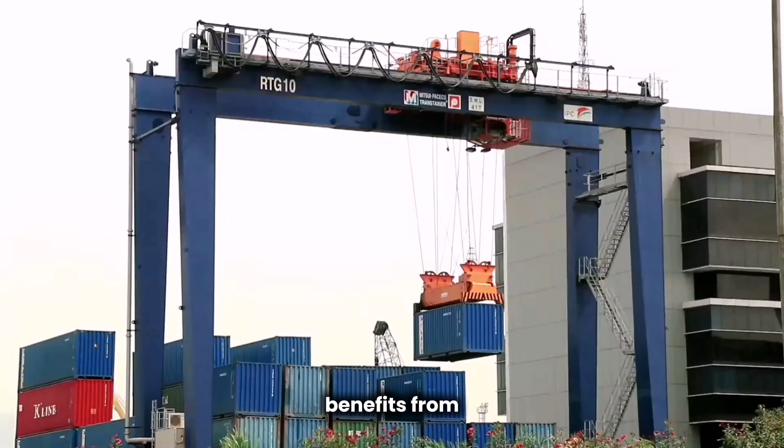Welcome to PT Fujita Indonesia, a leading forging company and automotive components manufacturing industry, strategically located in the Karawang International Industrial City. Located in an integrated industrial area and just a short distance from Jakarta, PT Fujita Indonesia benefits from excellent access to distribution channels. Founded in 2002, PT Fujita Indonesia began its journey of innovation and dedication to manufacturing components for the motorcycle and automotive industries.

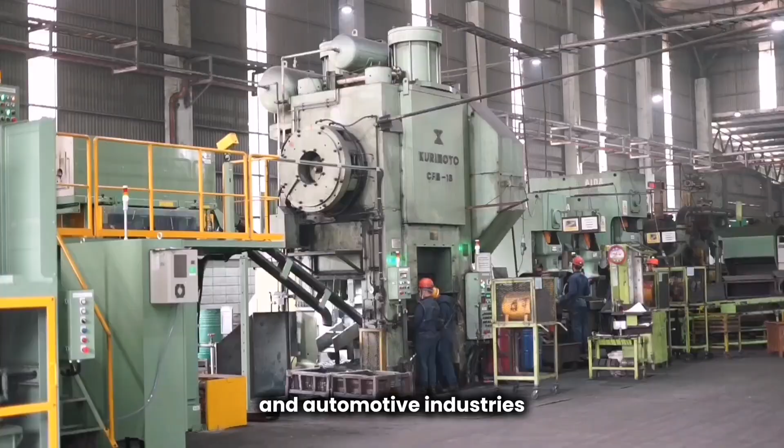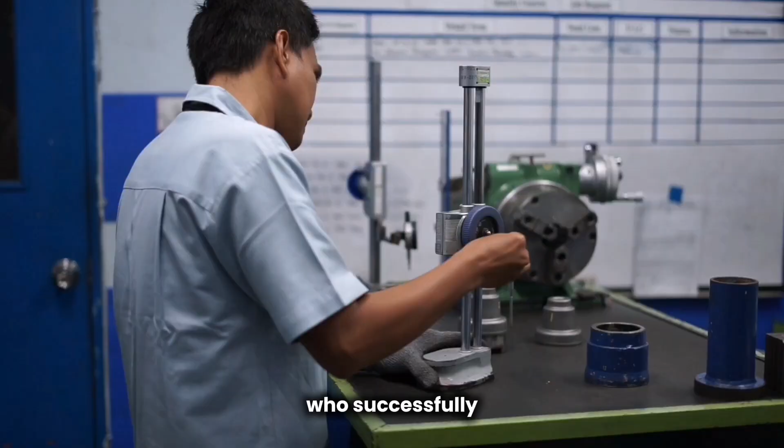Drawing inspiration from our founder, Mr. Tasaku Fujita, our company has consistently embraced the philosophy of Kaizen, or continuous improvement. Continued by the second-generation CEO, Mr. Seisaku Fujita, with a strong vision, he is the person who successfully created the foundational basis for all the companies within the Fujita Group.

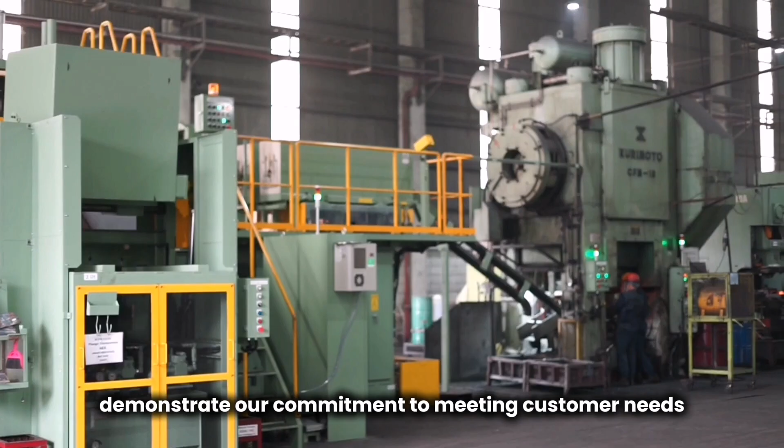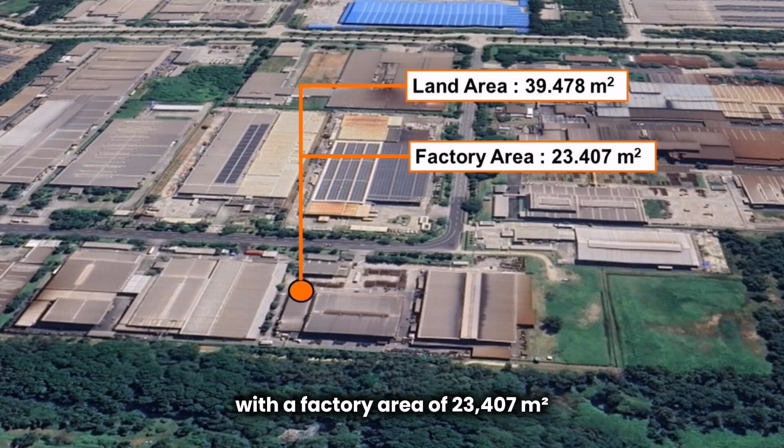In response to growing demand, we established Plant 2 in 2006 and Plant 3 in 2010. These expansions demonstrate our commitment to meeting customer needs with enhanced production capacity and stringent quality standards. Our facility spans 39,478 square meters of land, with a factory area of 23,407 square meters.

Currently, the commissioner of PT Fujita Indonesia is Mr. Tetsuo Fujita. He always brings a spirit of innovation and high dedication to advancing the company.

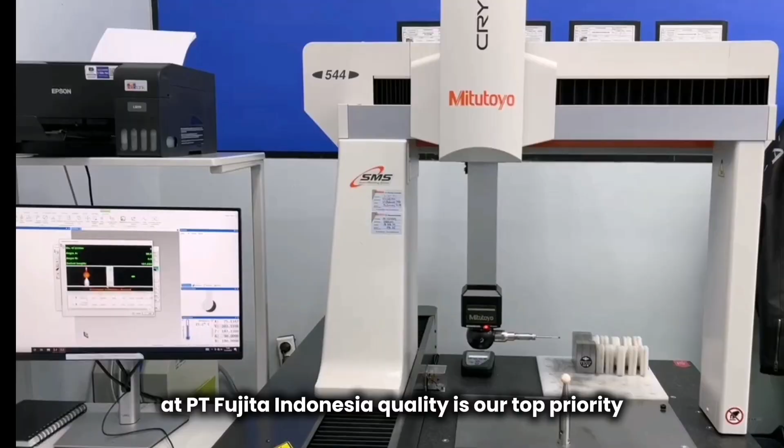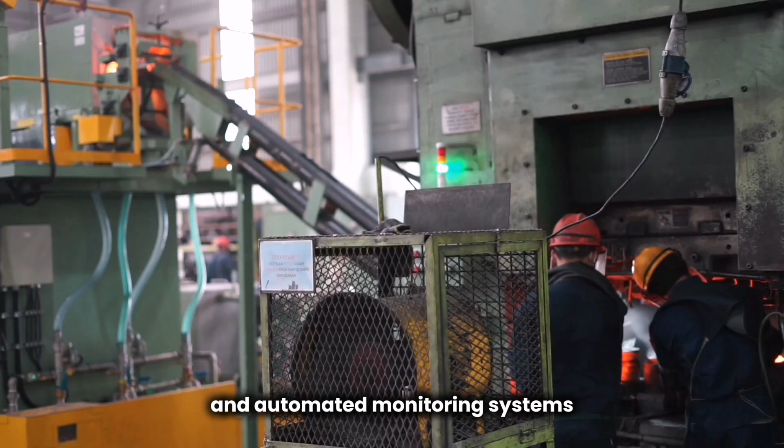At PT Fujita Indonesia, quality is our top priority. We implement rigorous quality management standards at every stage of production, from raw material selection to final product inspection. Utilizing state-of-the-art technology and automated monitoring systems, we ensure that every product meets the highest expectations of our customers.

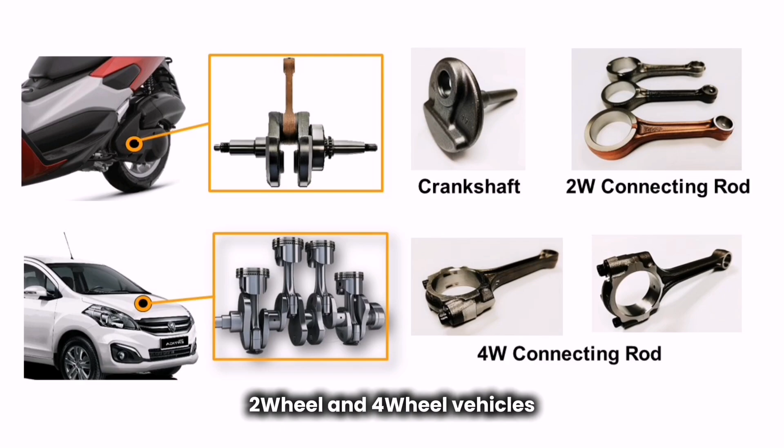Our product range includes vital components for both two-wheel and four-wheel vehicles, such as connecting rods, crankshafts, rotors, hubs, flanges, and more. Our customers include Yamaha, Suzuki, two-wheel and four-wheel, Kawasaki, Yamaha Electric, and many other companies to whom we supply forging parts.

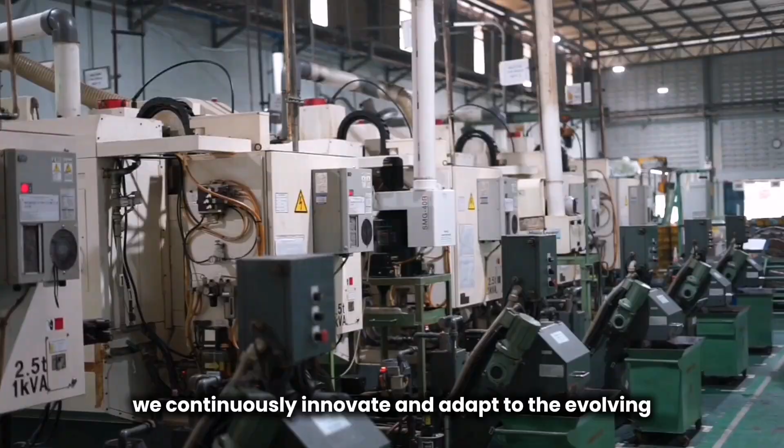Under the leadership of Mr. Keishi Fujita as President Director, we continuously innovate and adapt to the evolving global market. PT Fujita Indonesia takes pride in our achievements, receiving numerous rewards from our loyal customers. These accolades serve as concrete evidence of our dedication to providing the best service and high-quality products.

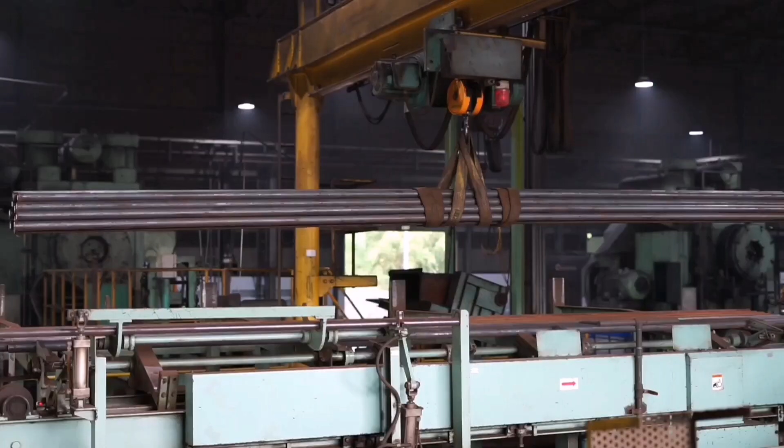We use selected raw materials with high precision, in the form of round bars, sourced from various manufacturers in several countries. These include Japan, South Korea, China, India, as well as local material from Jatim Steel.

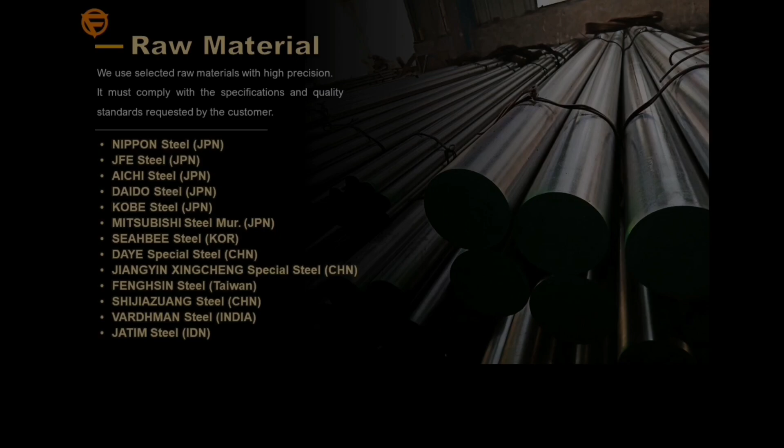Fujita has a group of companies. This is our group of companies, with Fujita Iron Works located in Kakegawa, Japan, serving as the parent company. Other companies in this group include Fuji Metal Mold, Daiwa Forging, and Fujita Vietnam.

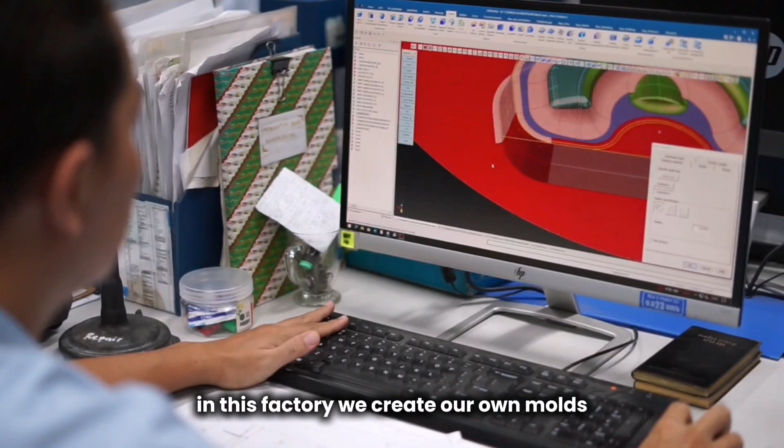In this factory, we create our own molds for the forging process. The engineering team is involved from 2D and 3D drawings to the programming for mold creation. Currently, we also have a forging simulation application to analyze the process virtually.

In the hot forging process, we have two main processes: forging press and forging hammer. Both processes involve using preheated raw materials with a temperature of around 1200 degrees Celsius. For forging press, we utilize air and electric energy, while forging hammer is more reliant on air energy.

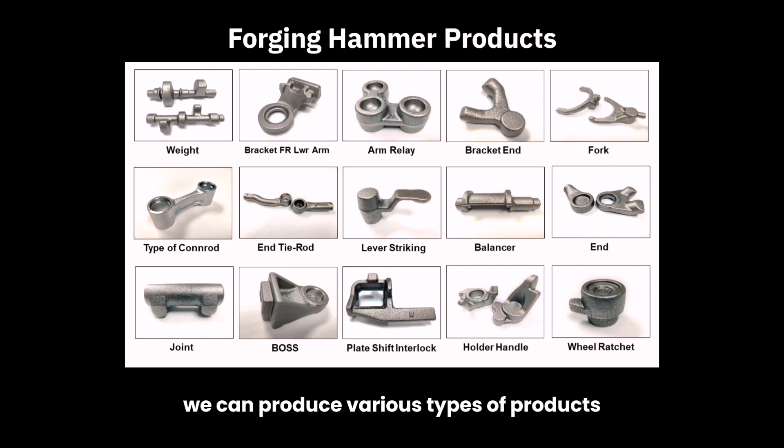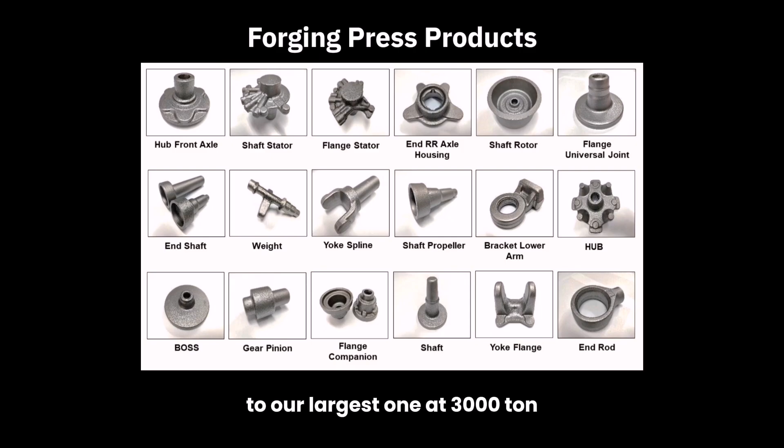These are the products we manufacture using forging hammer machines. We can produce various types of products according to customer requests. These are the products we manufacture using forging press machines. We have presses ranging from 1,600 tons to our largest one at 3,000 tons. This is the main machine we use to process our products.

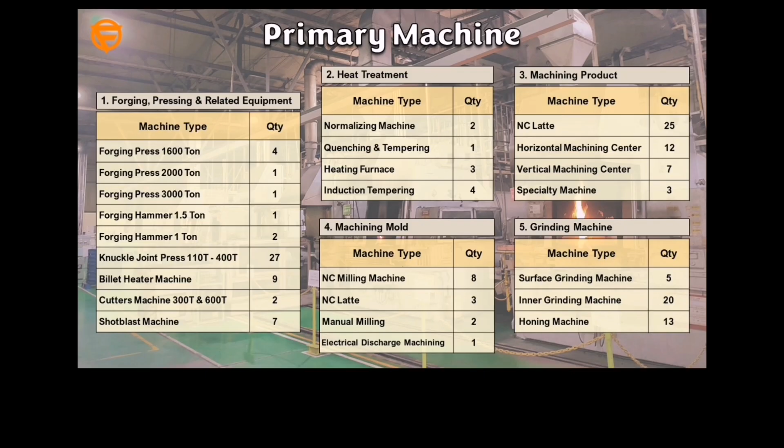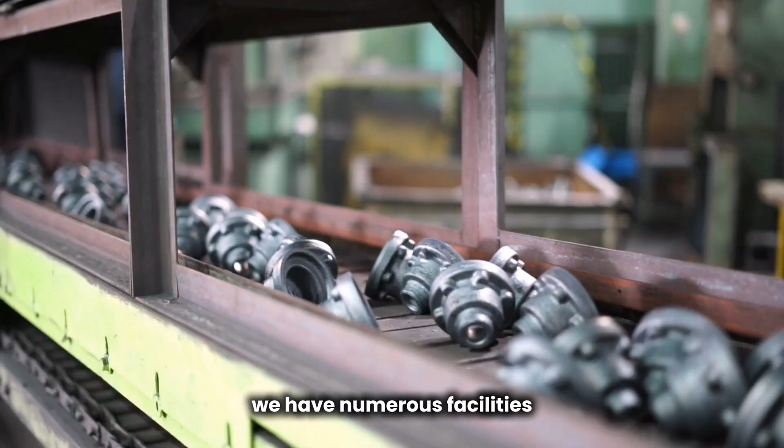After the forging process, the products move to the next stages according to customer specifications, which include heat treatment, machining, grinding, and finally, the finished goods stage. Each item's process flow varies according to customer specifications. We have numerous facilities that support this production process.

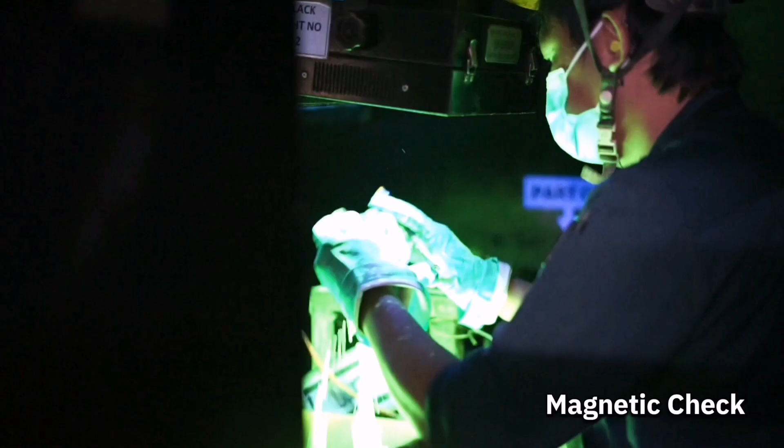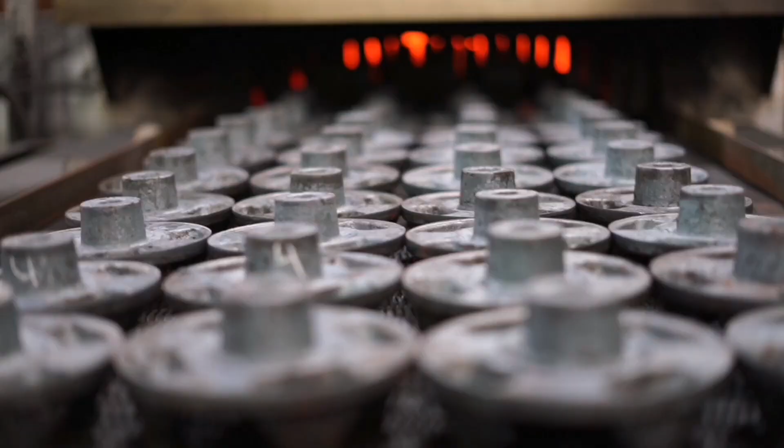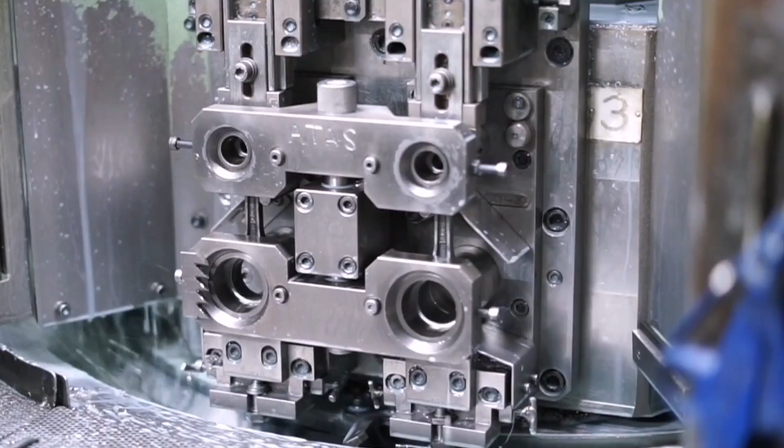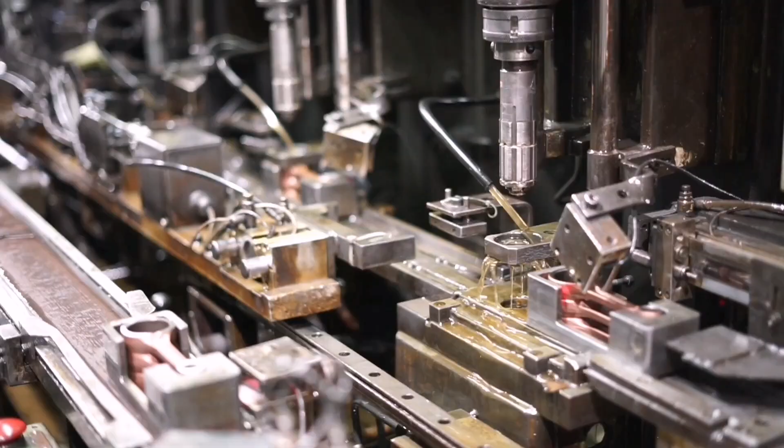Coining process. The magnetic process to check for cracks. Heat treatment carburizing. Induction tempering. Heat treatment normalizing. Heat treatment quenching. Machining. Grinding. Honing.

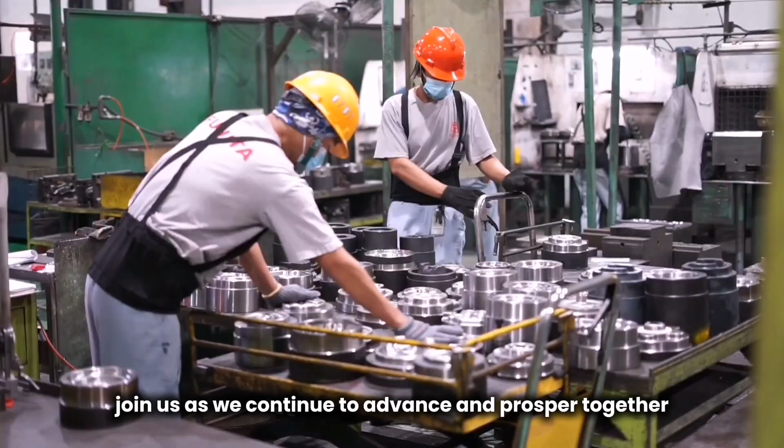PT Fujita Indonesia. Forging your path to a better future. Join us as we continue to advance and prosper together, driving progress for Indonesia and the world. Thank you for your attention.